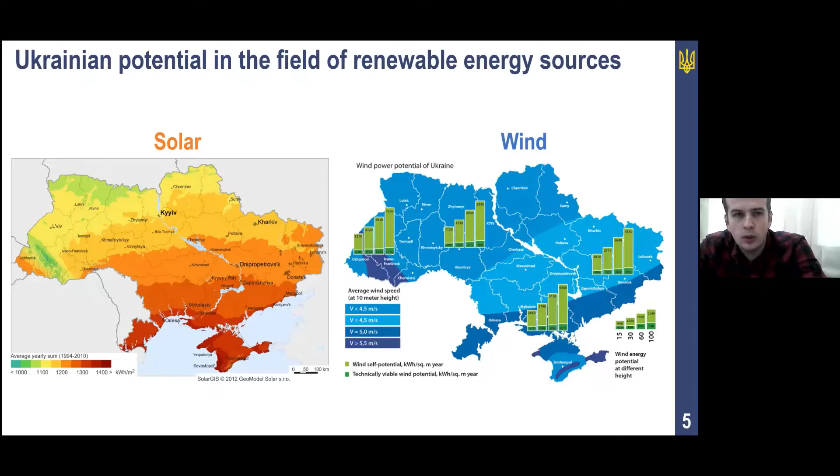Ukraine has huge potential in wind and solar, especially in our south regions, where we have huge solar installation and wind near the sea. Due to the last 3 years, we had a huge increase of renewable capacity and generation.

This was provided due to introduction of the feed-in tariff model. The installed capacity of renewables increased more than 4 times, most of it solar - about 7 gigawatts, 1.1 gigawatt of wind, and a little biomass and small hydro.

Also in Ukraine there is intensive development of small-scale generation of prosumers. Now we have about...

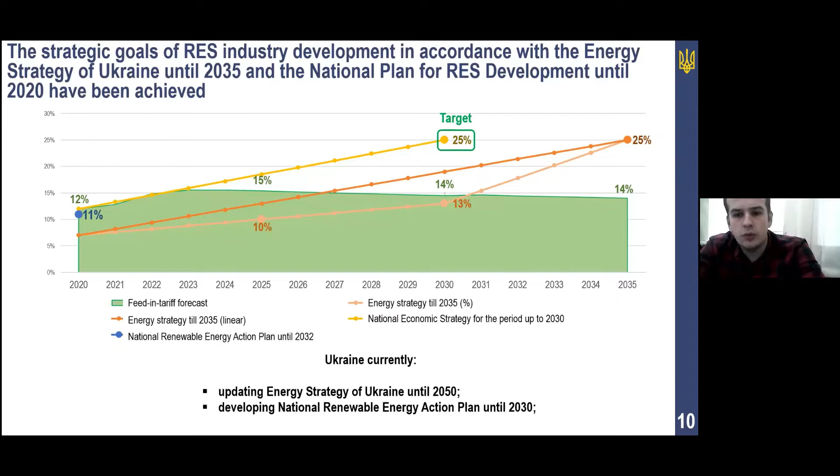The financial problems still exist, but the situation has improved. What's next? We are planning to achieve a target of 25% renewables in the 2030 electricity sector, revise our energy strategy, and develop a national plan. We plan to achieve this through auctions.

We created all the legislation for providing auctions through the electronic system, but due to financing problems, the auctions were terminated for a few years. I hope next year we'll launch it.

We plan to provide these auctions under the feed-in premium model, because existing objects were developed under the feed-in tariff, where producers sell electricity to the state-owned guaranteed buyer. But we plan to let existing producers leave the balancing group of the guaranteed buyer and sell electricity directly in the market and receive the premium. All new objects under the auctions have to be built only on the feed-in premium model.

In this case, we also plan to introduce guarantees of origin systems to confirm to the consumer that electricity was generated from green sources, and corporate PPAs, where RES producers sell electricity directly to consumers without any support.

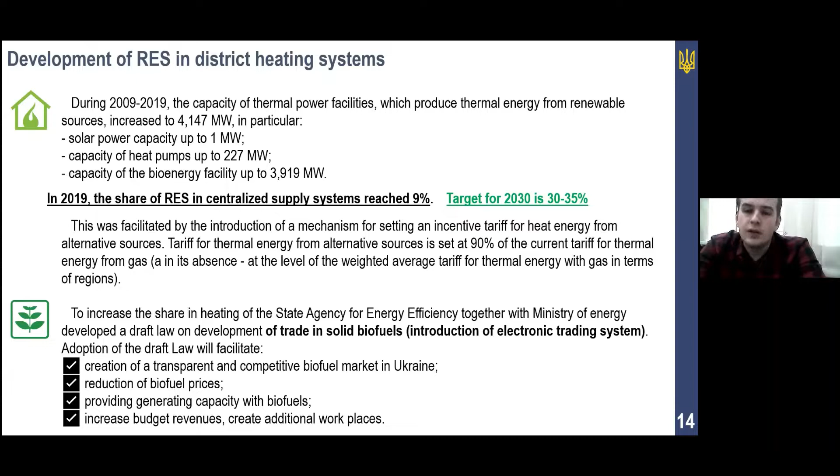A few words about district heating. In 2019 we reached 9% of renewables in district heating, mostly from biomass, and we plan to achieve 30% biomass by 2030, planning to introduce a biomass exchange. We were inspired by the example of Lietuva with a Baltpool biomass exchange.

The transport sector doesn't develop as well, but we see it's a problem in other countries too, where there's only more than 3% of renewables in transport. We're planning to achieve 10 or 14 percent by 2030. It's under discussion.

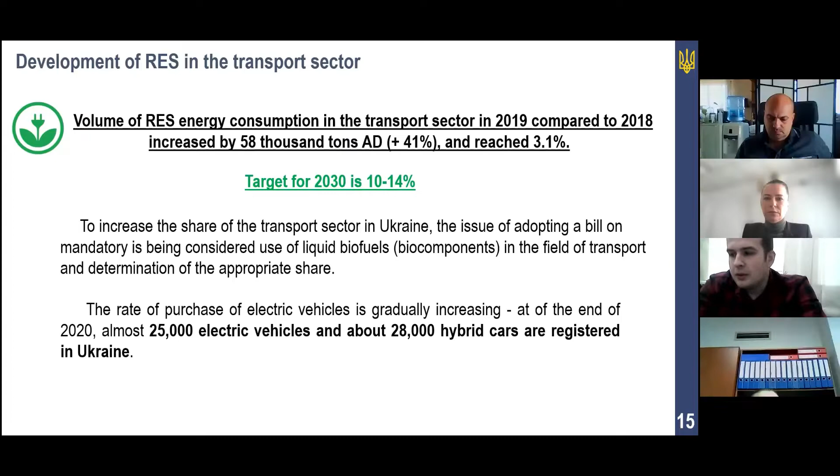But electric vehicles are really increasing in development in Ukraine. For example, in Kyiv we have a lot of charging stations, and I see a lot of electric vehicles and hybrid cars.

Other measures we're planning include construction of new maneuverable generation to avoid curtailment of renewables, and development of energy storage systems. The regulation has been developed and we expect it to be adopted by the end of this year.

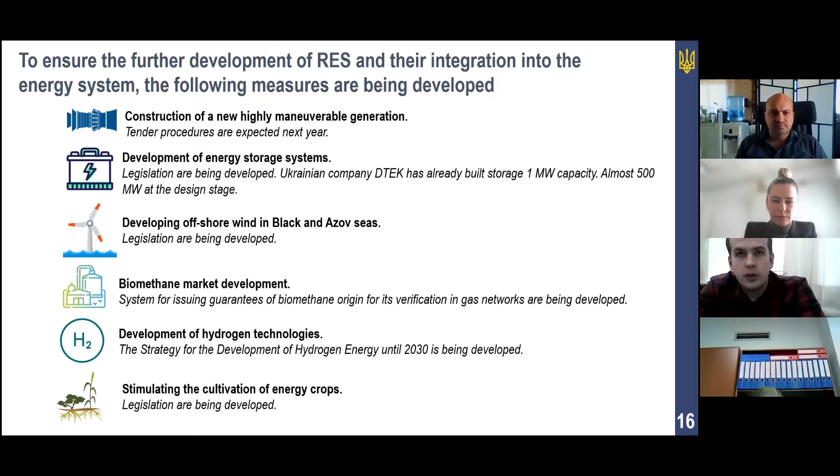One Ukrainian company, DTEK, has already built a 1 megawatt storage system and is now testing it, and other companies are planning to build almost 500 megawatts of storage. We're planning to develop offshore wind in the Black and Azov Seas.

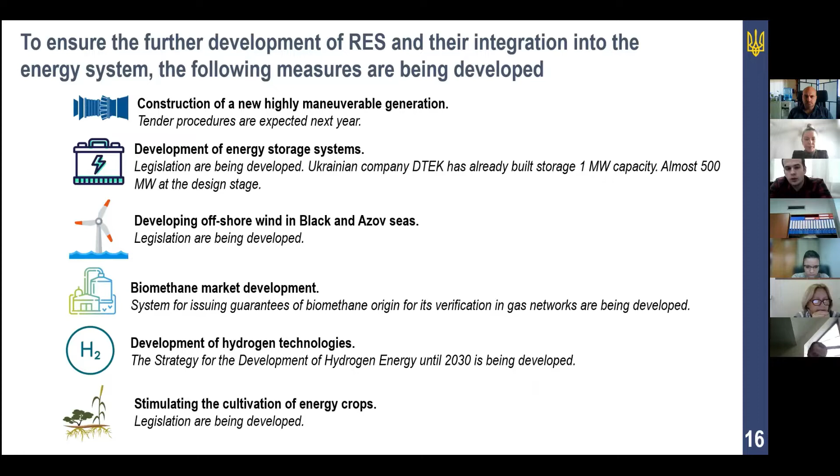Also developing the biomethane market, hydrogen, and stimulating energy crops, mostly for district heating biomass.

What we're expecting from the seminar is to get acquainted with renewable development mechanisms of other countries, to get recommendations on the integration of renewables, and to share Ukraine's achievements and the problematic issues we've faced in recent years.

I was watching the previous video presentations from other speakers, and we're especially interested in net metering and net billing systems. I heard it's introduced in Moldova and Georgia.

Yes, and this seminar is provided by an Israeli institution, and we're very inspired to know that Israel held successful auctions for solar with batteries, with a price of about 4.6 euro cents, which is lower than the market price in Ukraine. So maybe we could learn some experience on these topics.

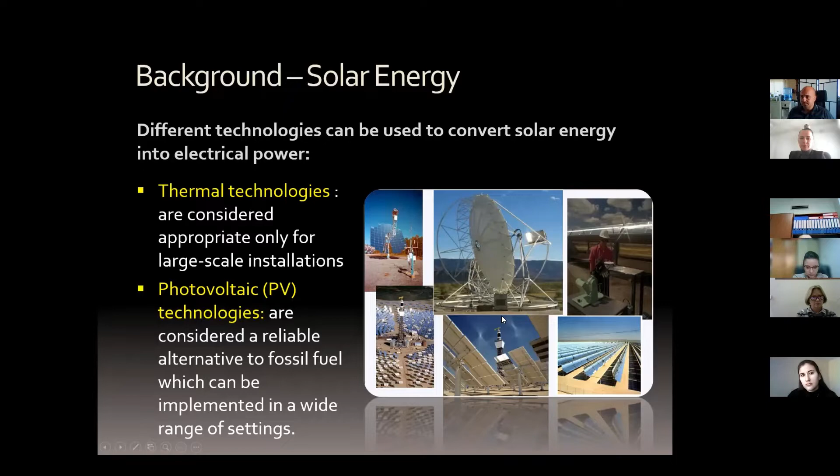Also, why do we use solar energy? Lots of obvious reasons, but there is almost no pollution or environmental impact at the point of using that energy. Of course, that doesn't account for the manufacturing process and where the materials are coming from, the mining of the material.

It is very flexible in installation, so we don't have to stick to a certain type of installation. It can be whatever surface that we have - we can always have solar panels that can generate electricity or energy based on the variables, so we can utilize the maximum or part of that maximum outcome of that energy.

It can be easily integrated in different surfaces. If we talk about buildings or open spaces, or even common spaces like parks or sidewalks, it's very easy to do it.

It's much less complicated than any of the other options, especially if we talk about stationary flat plates that don't require any tracking. So there are no moving parts, no mechanical parts, which means much less maintenance and service required.

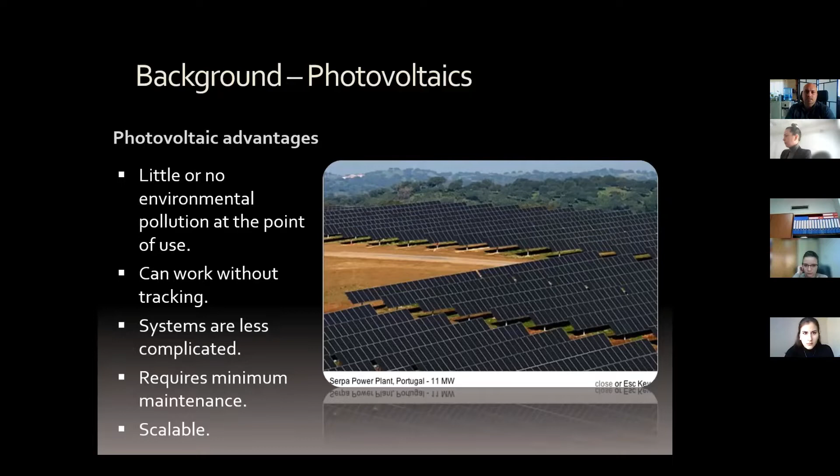Also, it's very easy to scale up. Once we install the system, that doesn't mean we are stuck with the size of the system - it can easily be expanded by adding other modules, expanding the inverters, adding other inverters, all that. Why? If we talk about, for example, a wind farm or a wind turbine, once we have the turbine, that's it - we are stuck with the size of the turbine installed, or the installed capacity.

A general look at what technologies are available for solar energy, mainly photovoltaics. So we have silicon-based, and that's the most common - the most common now I think are multi and single crystalline. I don't know if ribbon cast is still in use of the silicon technology. Amorphous silicon still exists, mainly because it's flexible - you can use that as a cladding material for rooftops, and it can be shaped in different forms to meet the requirement of the surface that we are using.

There are other technologies that are not silicon-based, and there is always competition between different research groups looking into alternatives for silicon. So we used to have the CIS technology that I don't think it exists anymore - I think it died something like 5 years ago. Actually, an outcome of this study was that the CIS technology is too expensive to be used. The balance of energy is not good - we are investing more energy in building the technology than what we're getting out of it in its lifetime. So it's not feasible. The cadmium telluride, the CDTE, I think it's still in use, but much less. The dominant now, as I said, is silicon-based, mainly single and multi-silicon.

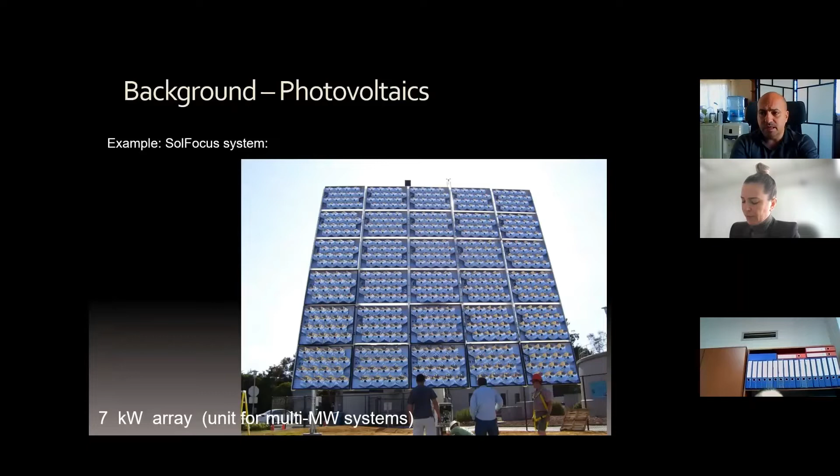One of the main examples for the concentrator systems, here we are talking about solar concentrator systems, is the SolFocus technology. SolFocus was created by two students at Ben Gurion University on the Sde Boker campus in the south of Israel. They actually moved ahead and established a company in South California that mainly manufactures this type of cell.

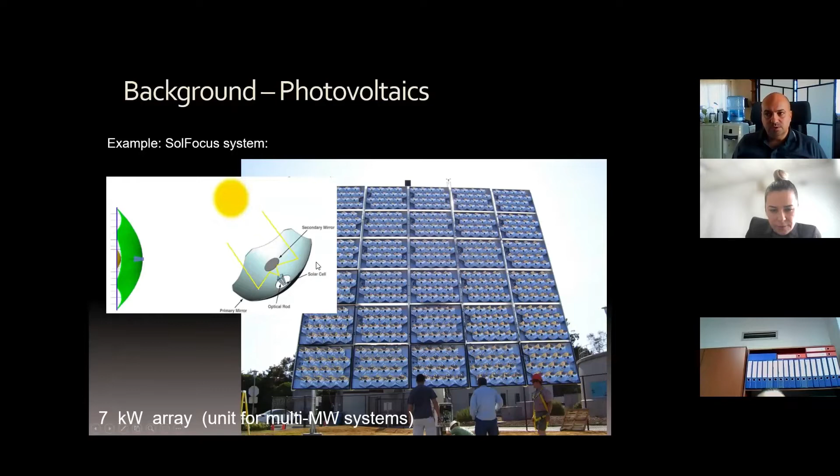It's a very smart design. If we look at how it works, it uses primary and secondary concentration of solar light with the use of solar geometry to concentrate that. I think they used to get something like 300 suns concentration for their system. So this unit, the one that we see here, is a 7 kilowatt array.

Another system, let's talk one more sentence about this one. Unfortunately, the company didn't survive for a long time. They actually operated for something like 7 years. But then, because of the mass production of flat plates and the difference in prices between flat plates and the SolFocus system, SolFocus simply died and couldn't compete with them. They didn't manage to get enough clients to buy the technology.

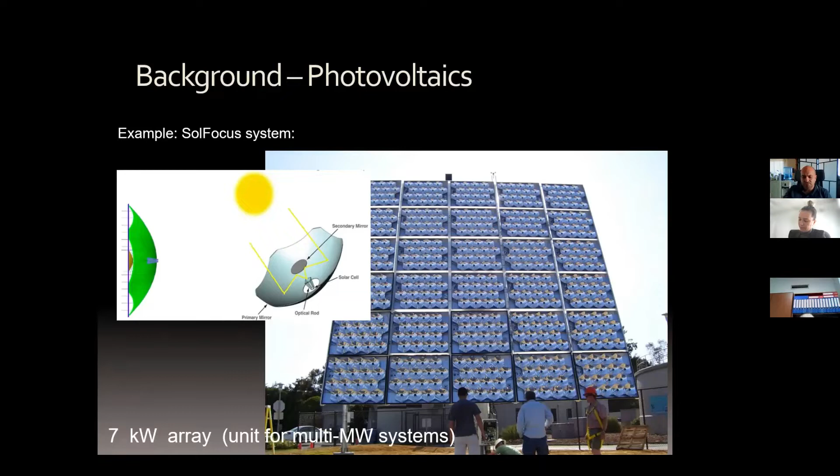Also, adding in mind the complexity, because it's a concentrator system, one of the main requirements for concentration is to track the sun hourly and seasonally. So we have to have dual axis tracking, and that makes the system more complicated, with more mechanical parts. Any misalignment with the sun will cause lots of losses. So people always prefer simplicity, especially if we get the same amount of output. And recently, the cell efficiency for flat plates is increasing, so it puts all these different options at risk.

The other system of concentrators is what's called FlatCon technology, or FlatCon systems. Very similar approach, but the main difference is they are using lenses instead of mirrors. So the concentration is done via a lens that concentrates the sun on a small spot where the cell exists.

You can see my pointer, right? The mouse. Over here, you see the bright spot, that's where the cell is. And one of the main advantages of using concentrator solar systems is the reduction in using cell material.

10 or 12 years ago, silicon was very expensive, and that's why the alternative technology option was very active. One of the main branches of how to overcome that cost is to use less material, less silicon, and the other is to find alternatives for that. So using less silicon means we need to have higher solar radiation per unit area in order to have a good output.

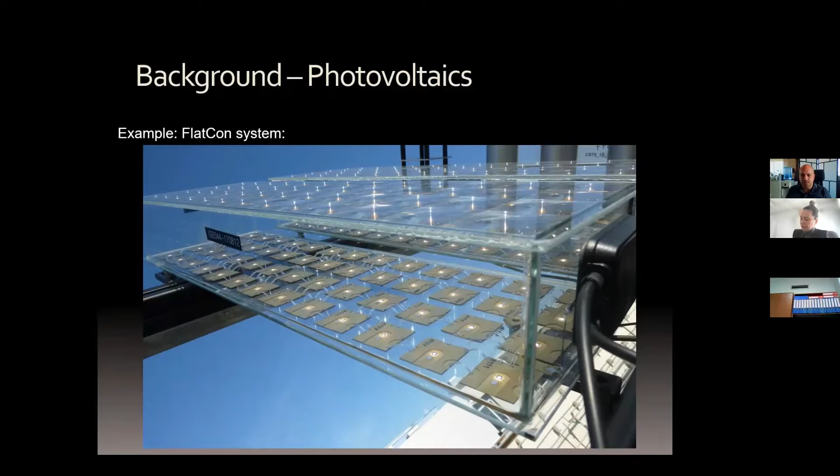This is also another system that was built by this company. I think FlatCon maybe still exists. I didn't hear anything about them for the last 3 years, but before that they were still out there.

So that's by technology type, and by installation type we have 3 different levels. What we can talk about is centralized photovoltaic power plants, and that's something we are all familiar with, with large fields. We get thousands of square meters, we install the system, we connect it at high voltage.

Or on the other end is building integrated photovoltaic, on the rooftop, on facades, and something in between, which is a combination of both. Like here, we can call it urban integrated, but in the study itself it's called kibbutz integrated, because the field of study was Kibbutz Ketura, where the Arava Institute is located. The main idea is to utilize all the different potential areas for installing solar energy and see what is the outcome we can generate.

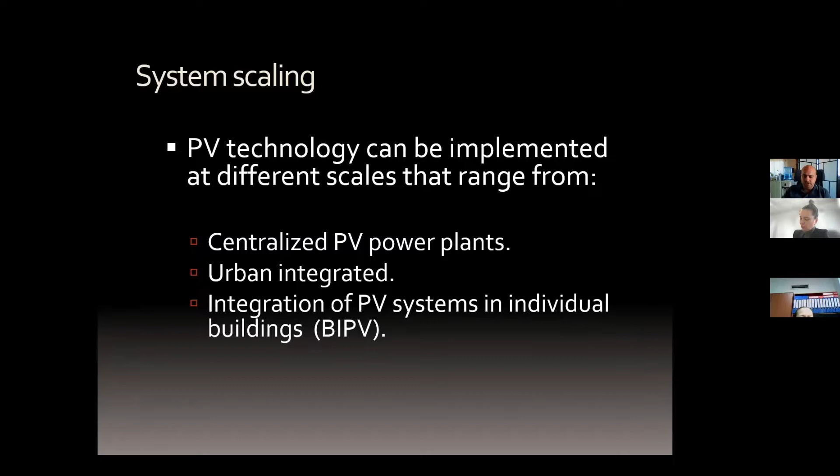Giving more examples and also the comparison of these different technologies, and why.

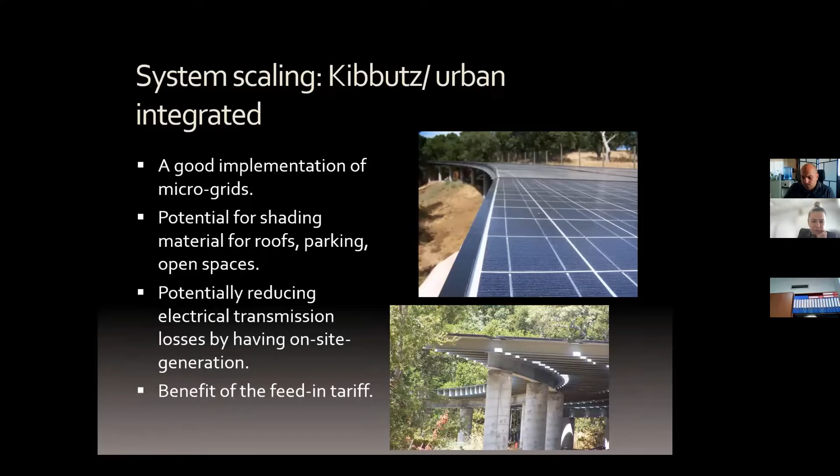For my neighbors, it was a very unique way of thinking about it. I have a nice terrace, and I wanted to put some shading material or shading structure on the terrace. Even though I live in a very warm city, today it's about 24 degrees outside, and rainfall happens only once or twice a year. But even with that, when people want any shading structure, they use that tilted roof, similar to what's in Europe, because it looks nice. But it's totally out of the architecture here, it doesn't fit with the nature of the city.

So I wanted to, instead of using that, use the solar photovoltaic system as the shading structure. I was very surprised that nobody did it before. It makes lots of sense — you have a space, you want to use it. In this way, we have a dual usage of the space: we generate electricity, and I can sit there at noon, especially since that area is south facing. It significantly reduces the heat the house is getting by having this shading structure.

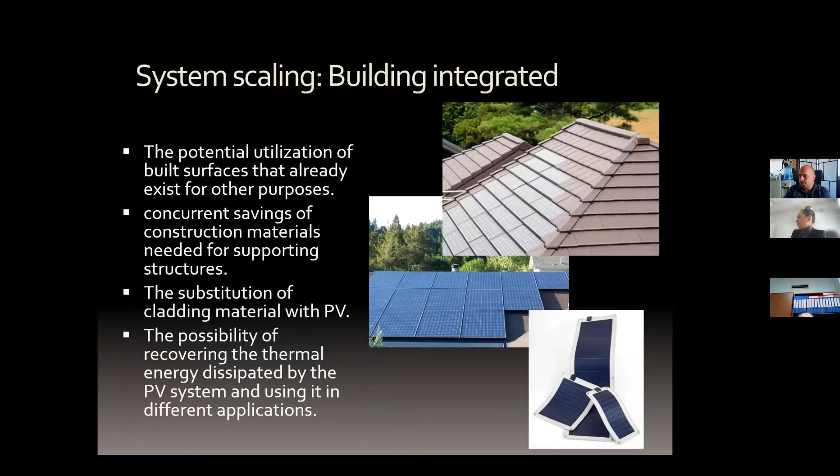Because of building integrated photovoltaics, the option of feed-in tariff became very popular — everyone can be an energy producer. Of course, we will not talk about the downside of that, how it's limiting or adding more variables to the grid and grid stability. But here we are talking about how households can benefit from that, and what's another incentive for them to be, to a certain extent, independent energy-wise.

The main downside is that the responsibility of cleaning, maintaining, and making sure the system is working lies on the owner of the household itself. Also, the size is an issue — we are always limited by space, so the amount of kilowatt hours we can generate is very minimal.

This is very suitable to what I always say, that we need first to look into energy conservation and saving before we talk about finding other sources of energy. It used to be, and I think it's still valid, that the major consumer of energy in buildings is heating and cooling. So first we need to look into our energy efficiency in the building thermally, how the building is functioning, try to maximize that efficiency, and then see how much of that required energy we can rely on solar instead.

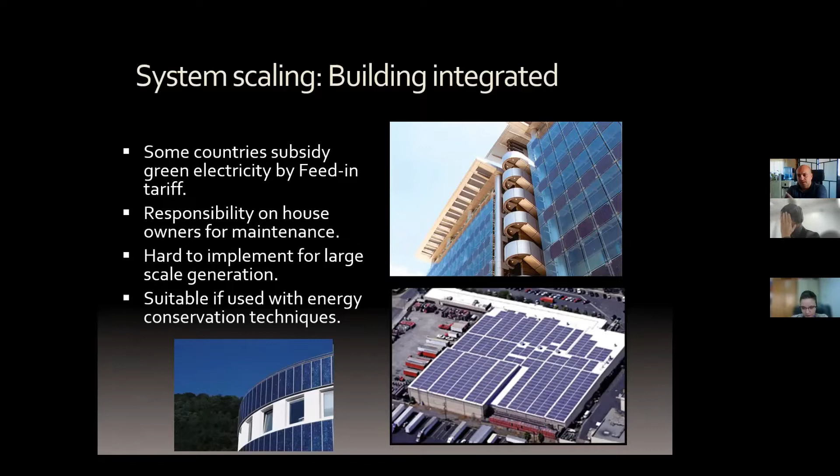So let's get to the topic: the life cycle, or energy life cycle, mainly looks into both the inputs and outputs of an energy system. The input energy, mainly called embodied energy, is how much energy we actually invested in order to build this system or technology — a measure for any technology we are using or manufacturing. The output is the potential output energy over the lifetime of that technology, or the energy balance of this energy system.

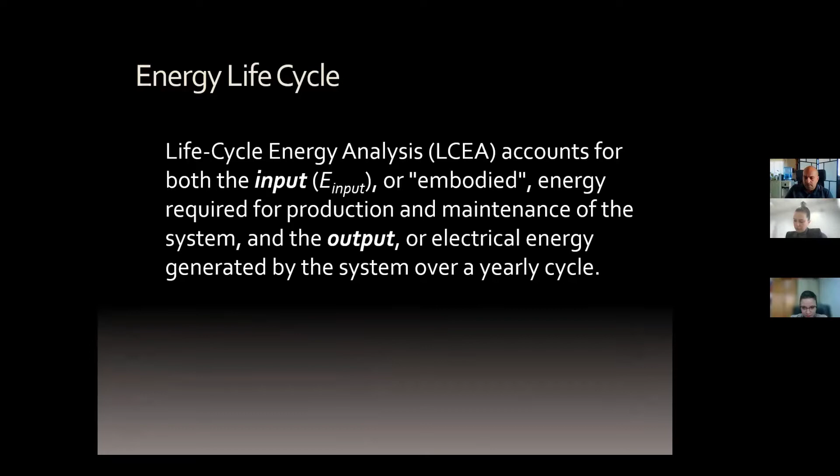To compare the two, for an energy source to be competitive with fossil fuels, we need two important characteristics. One is that the energy supplied by the system over its operational lifetime should be significantly greater than the input or embodied energy — simply that we didn't have a losing investment, putting more energy into something than what it will generate.

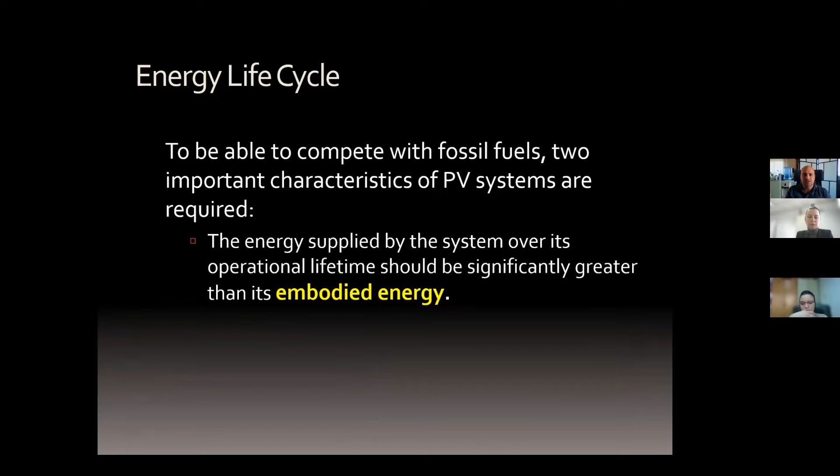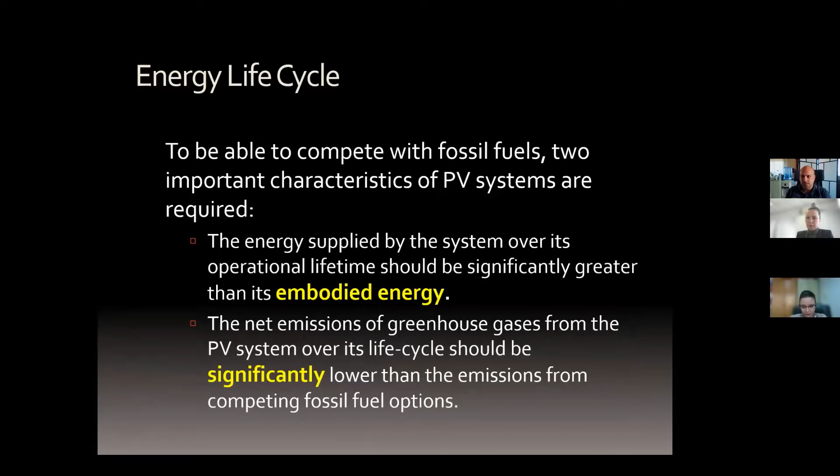The other is net emissions, which is mainly about being competitive with fossil fuel. The net emissions of greenhouse gases from that system should be significantly lower than the alternative of using a fossil fuel source instead. So this criteria will be our main judgment or evaluation for the technology we are using.

So how we measure that is mainly by looking to the life cycle energy analysis. The life cycle analysis looks into the life cycle of any product, from manufacturing, even mining, even before that, all the way down till decommissioning and disposal. We take every step of that process and try to account for what different resources that product required in order to be manufactured, used, delivered, assembled, and even disposed.

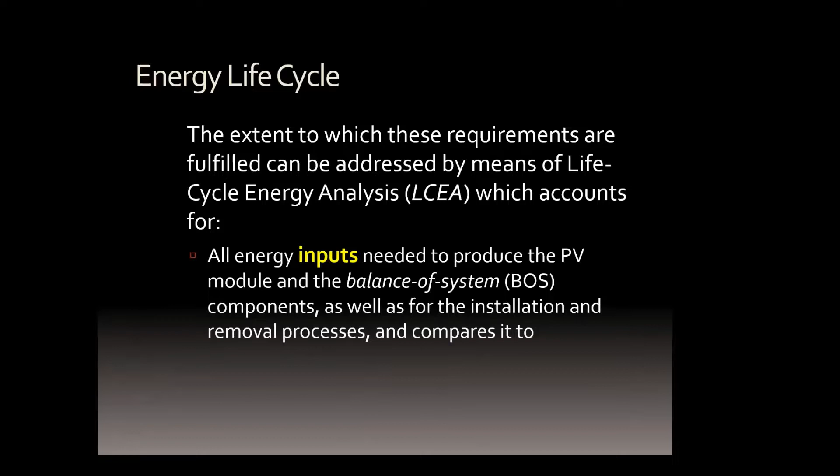If we talk about life cycle energy analysis, then we are only focusing on the energy component of that analysis. What we need to do is account for all the input energies that we used for building the module. If we talk about photovoltaic here, then we are talking about the module itself, the cells, the frame and the encapsulating material, the packaging, transportation, and also the balance of system, which is the support structure, the tracking if it exists, and cables and all the different non-photovoltaic components of our system.

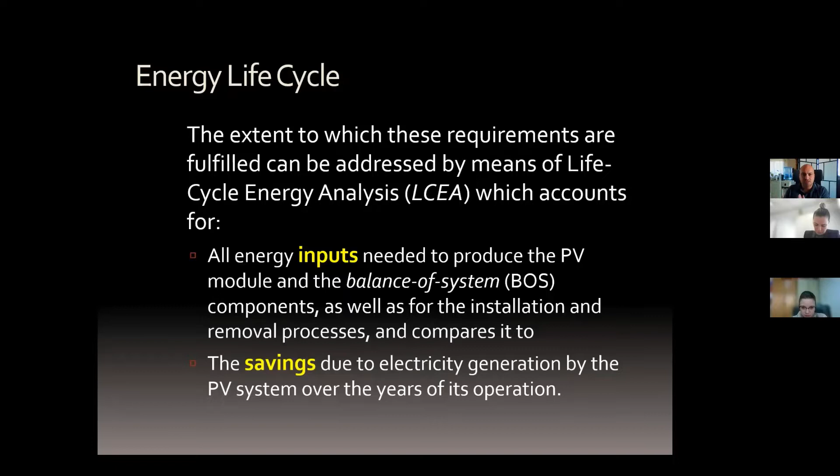Then that will be compared to the savings, how much energy we are actually saving by using that technology afterwards. In other words, what is the output of this technology that we are using? As you noticed last class, I love flowcharts. So this is a simple flowchart of how we actually do this comparison, or this life cycle energy analysis.

The first step is we prepare a list of the different photovoltaic technologies that we want to compare. Here I'm talking about photovoltaic, but this can be used for any other technology. If we want to talk about the different technologies used for biomass, geothermal, tidal, all the different options can be listed.

Then the first calculation needed is how much energy we are getting out of this technology. For that, we need to get what is the initial bulk of energy available, how much solar radiation is there in that specific location that can be utilized to start with.

We also take into consideration the heating potential of the PV. We know that the efficiency of a photovoltaic cell is dependent on mainly two things: one is the available solar radiation, and the other is the surface temperature of the cell itself, or the cell temperature. Then we need to understand, in that specific location, what is the potential of heating that we will be dealing with. Then we talk about the efficiency, mainly the nominal efficiency, how much the manufacturer says this panel can convert the available solar radiation into energy.

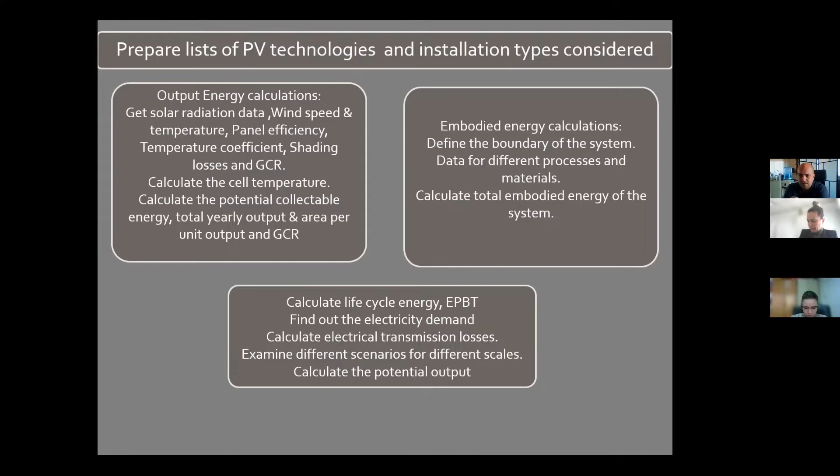Then we calculate the different measures or factors, first the life cycle energy, which is the total number, and the energy payback time. The energy payback time is a very interesting number for engineers and for economists. It's similar to the return on investment - it's like, in how many years, or what percentage of yield, is the output energy compared to what we invested in building the system. So the energy payback time is a very useful measure.

Then we can also calculate, in order to get to these numbers, what is the demand of electricity in this specific location. Do we actually need it, and if there is extra energy, what will be done with that extra energy? If we're using transmission lines, there are for sure losses in that transmission line. We should account for this in order to get accurate numbers at the end.

To compare different installation types, we come up with different scenarios of what installation we need. For example, if we're using a centralized power plant, we know for sure the power will not be used at that centralized power plant - we need to transfer it somewhere else. That introduces other variables, like energy losses in transmission and energy losses in transformers, like increasing the voltage level to be able to transmit it, then reducing it to be used. Based on that, we do our calculations on how much actual energy we have at the end of the wire, the end of the cable.

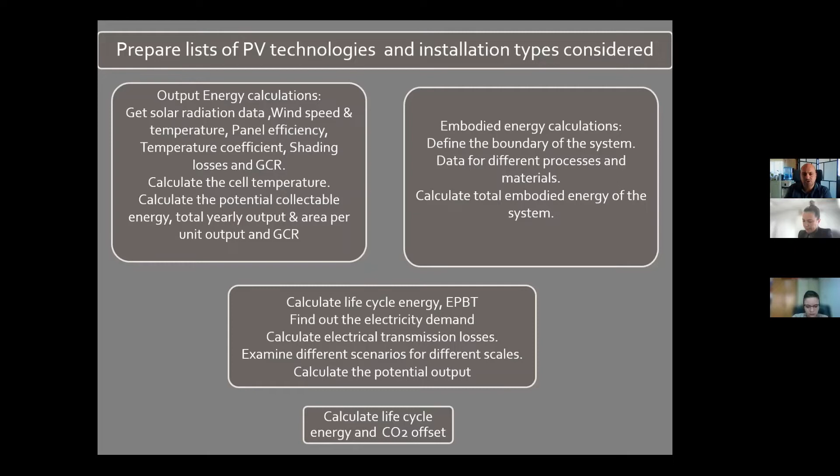After that, we use equations we'll talk about here, like calculating the life cycle energy and the CO2 offset. The CO2 offset is a very interesting parameter that gives a good indication - everyone is talking about reducing CO2 emissions, but nobody talks about how to actually do that. Using renewable energy for sure reduces your CO2 emissions, but if you have very strict goals to meet and very limited options of technology and available land, how do you decide which technology to use to get the higher CO2 offset for your electric system? So we introduce a new parameter, based on all the previous calculations, that gives us a value for that piece of land - what is the potential CO2 emission savings if we use this technology or another?

Let's go more in depth and look into the input energy, or embodied energy, in a photovoltaic cell. We broke the system into 4 components. The cell material itself - if it's silicon or other than silicon, multicrystalline or single crystalline. Then the encapsulation material, the thin film they put on for protecting degradation and holding the cell, plus the conductors that collect the energy produced. Then the balance of system - the tracking system, the support structure, the frame of the panel itself. And then transportation - once the panel is ready with the inverters and all that, how we transport it from the factory to the place where it will be used.

Then we talked about the system boundaries, and in order for us to proceed to have an output, we need to have limitations. Otherwise, we can go forever in our calculations.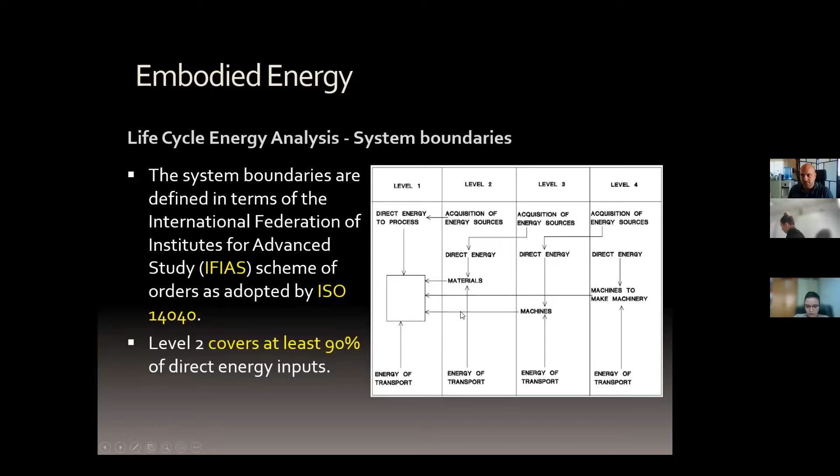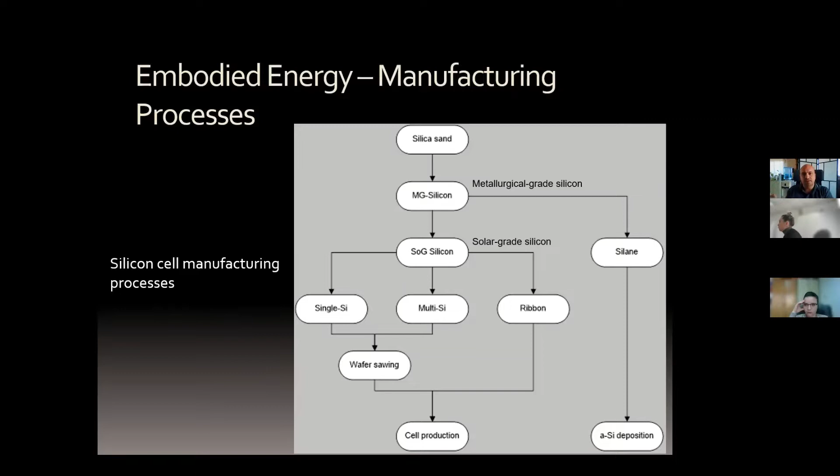Then sawing that ingot and getting the different cells. There are also losses in all these processes when we get from the silicon all the way to the cell - losses, I mean, other than energy losses, there are material losses as well.

We also looked into other types of cells, the CdTe and CIS. For that, there is a totally different process because they are using different materials. So here also we need to look into the different stages of manufacturing. What I found out is that the process of manufacturing these alternative technologies is much simpler than the process of manufacturing silicon-based cells.

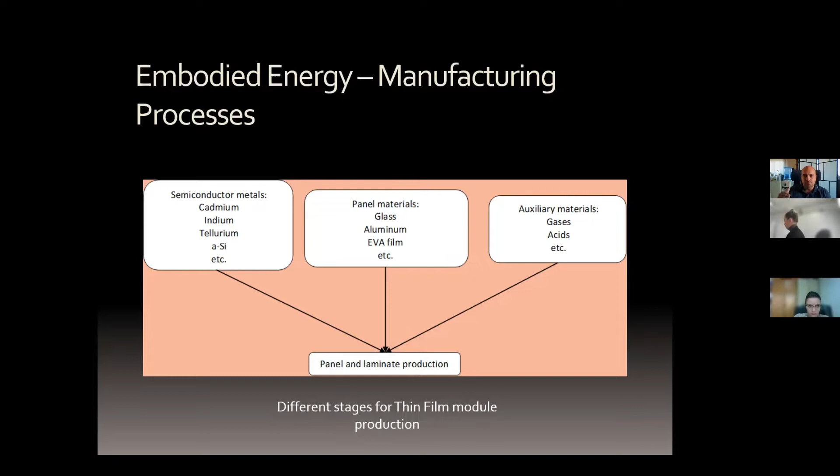So when we look into the different stages, there are available datasets that already provide the energy uses for different processes in manufacturing. They have a very good number of information, or of data, actually, on what is the values of energy used in order to go through each of these steps.

So after we get all the energy inputs, we account for the different variables. I'm going a little bit faster because we want to give some time for discussion and also afterwards for the projects. So I'm touching mainly on the principles of the process. If you need more details and are interested in the detailed calculations, I'm very happy to send you more material about that.

It's simply my master's thesis, so I'm very happy to share it. We actually did a publication on that. So we look into the output energy of the panel, and for that we need to calculate based on, as I said, hourly data, and even higher resolution than every hour is even better - we'll get more fine tuning for our system. For any photovoltaic cell, we have two main variables that we need to look into, or restraints, I would say.

The collectible solar radiation - how much is there to start with - and what is our cell efficiency. It's like, okay, we have an X amount of energy to start with. Our cell can only utilize 16% of that. This is where we are actually starting, at 16% of what is available for us. These are the main limitations we talk about - everything else is variable.

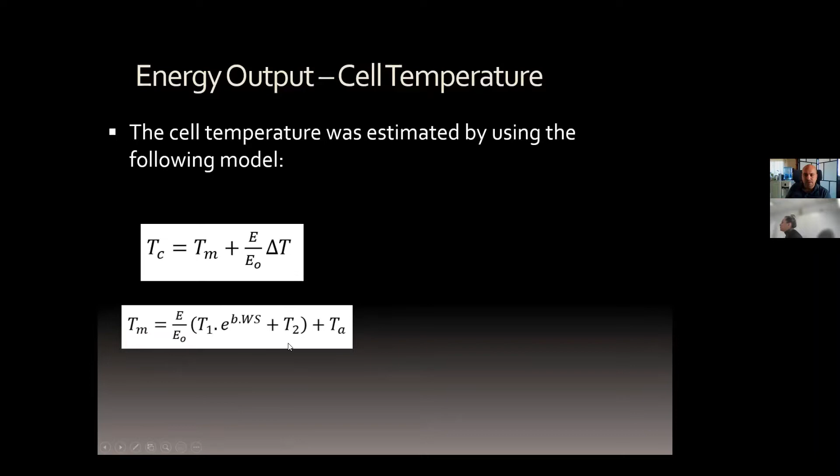Based on that, we use a model generated by a US researcher. I don't remember his name, but I have the reference if you're interested, for how to calculate the cell temperature based on the atmospheric temperature and the temperature coefficients. Here we have mainly two variables, T1 and T2, and both are dependent on the material of the module.

What was used? Is it glass? Is it plastic? Is it 2 layers of glass, 1 layer of plastic and 1 layer of glass, or all of that?

TM is the surface module temperature, measured or calculated here. If we don't have it measured, we can have a good estimation of how much it is.

TA is the ambient temperature, the measured temperature of the location where we are. The solar radiation on the module, and the solar radiation as a reference, which is the standard test condition. The wind speed, to account for the cooling effect of the wind on the panel itself.

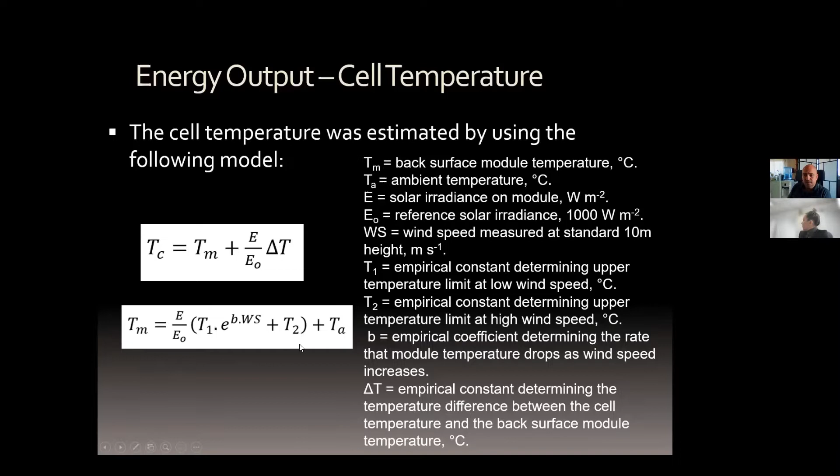Then we have empirical constants based on what type of material is being used. And the delta T is another constant that will be used. I give different reference values of these different coefficients that can be used.

By simply plugging in the ambient temperature and our solar radiation and the variables here, we get the potential cell temperature. By knowing the cell temperature, we can go back to the nominal temperature coefficient and see how many degrees above 25 we are getting. For each degree, we have a 0.4% decline, for example, for multicrystalline, on our efficiency.

Then to account for the ground cover ratio, we said that the ground cover ratio is how much of the land we can utilize for our system. There are different numbers already published by other researchers we can use, or we can work with geometry and try to find out what amount of shading is acceptable and what is not.

So keep in mind, if we are using a polar mount, tilt equals latitude, for example in Jordan and Israel we use something between 20 to 25 degrees tilt angle for the panel in order to maximize the yield between winter and summer, when the sun's angle is different in the sky.

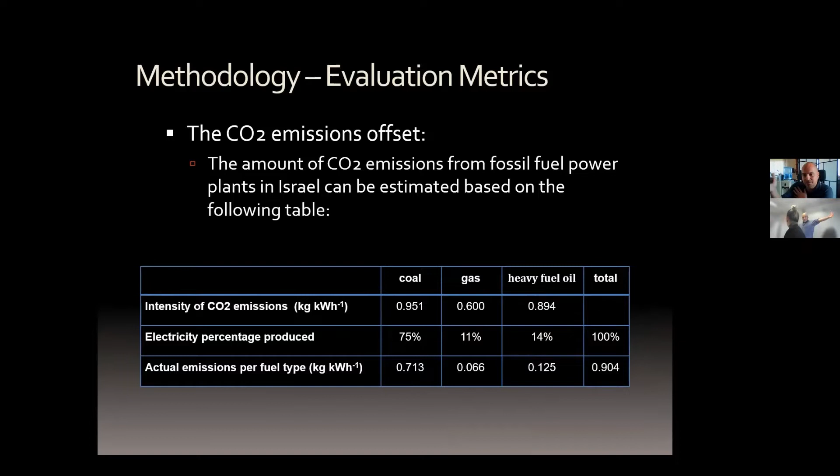Why is this important? Because what we are offering here is offsetting a certain amount of energy, of power, with solar energy, for which we already know the energy payback time and the energy return factor. We already have these numbers. So here we are saving the system that amount of energy by introducing our solution, which means we are offsetting the amount of CO2 that will not be used anymore by using our system.

So in the calculations, in the results I will show in a little bit, a 20-year operation lifetime was assumed for the thin film, because thin film technology degrades faster than crystallized silicon. For crystallized, we assumed 30 years of operation and a degradation of 1% per year in the efficiency of the system.

So we got the CO2 emissions, which is the total energy balance, how much net energy we are getting from our system, multiplied by the potential CO2 emissions. The potential CO2 emissions is the equivalent number, which is this weighted average. And the energy balance is actually the output minus the embodied energy we already calculated.

Based on that, we can say that if we use a single crystalline stationary tilt-equals-latitude PV power plant, then we know the amount of CO2 we are offsetting, saving our country. If we say, okay, we are using a mix of technologies...

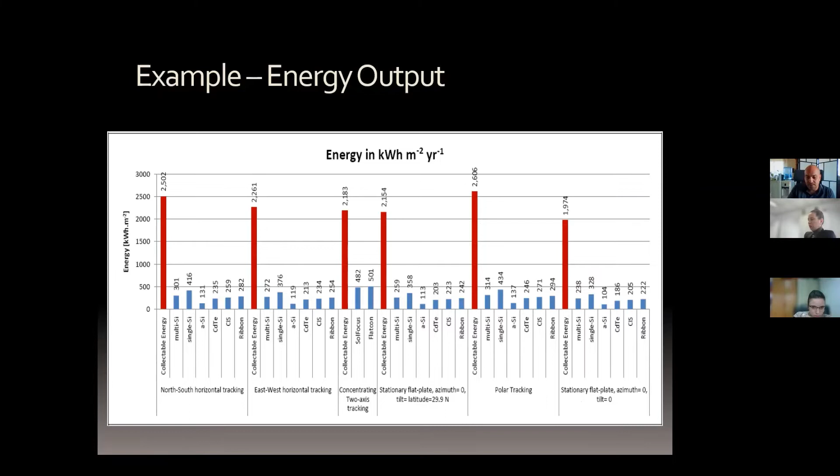The worst was the stationary installation, because that doesn't account for any variables, like the Earth's rotation around the sun having different positions based on the year and time of day. So we are not utilizing that at all.

I always keep telling people—one of my friends wants to use LED lights for agriculture, and they say we can use the light itself as a source of energy to reduce our heating load. I tell them LED has a certain power rating, usually like 5 to 10 watts. Based on that—sorry, I live next to the mosque, so we keep hearing that all the time—anyway, if your input is already 5 watts, you cannot get more energy out of it. You cannot heat your plant using an LED light because the input energy is low, so the heat loss from the LED is very small compared to a regular light bulb.

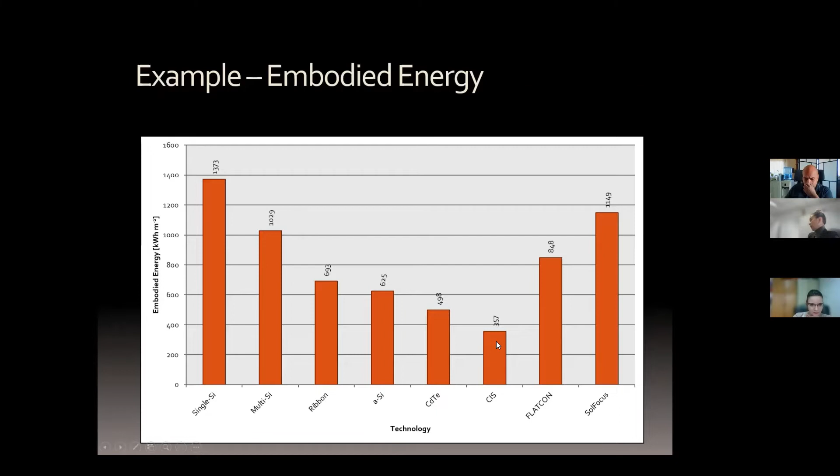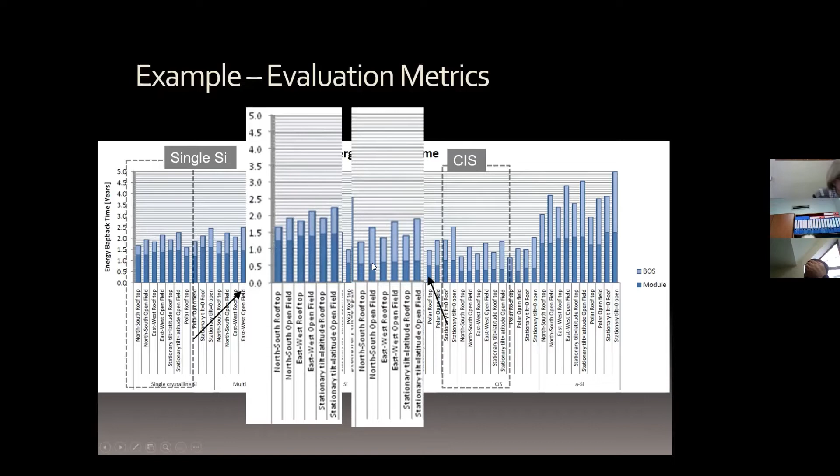Amorphous silicon always needs more land than the others because in this study it had around 6% efficiency. Then the next ones are the ribbon, or the CdTe and CIS ribbon as well. The expectation and output of this study was that one of the worst technologies to be used is the a-Si, because once we look at the different variables, it shows the worst performance.

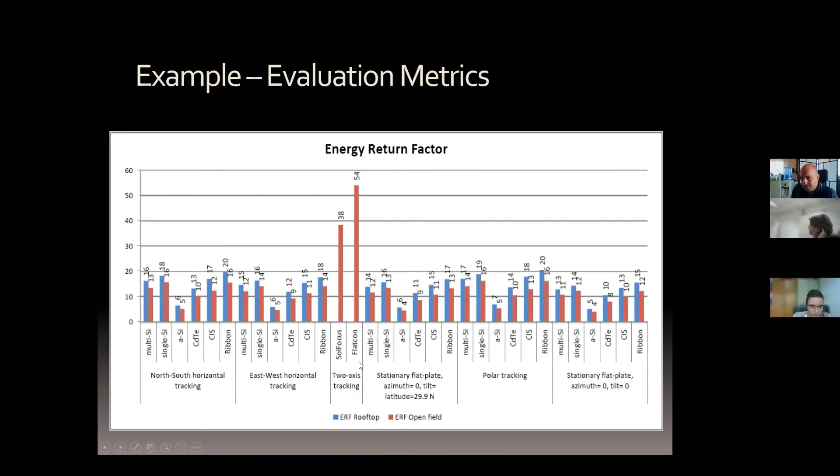Another comparison between the two. Then we combine that with the CO2 offset per land. The blue is for rooftop and the red is for open field. The main difference between the two is the support structure. With rooftop, we're already utilizing a building that's already built, so the energy was already invested in building that system and we're just using it as our support structure. In open field, we need to build all that support structure, like the foundations. There are different approaches, like ramming instead of concrete foundations, but I don't think that will change the equation much.

We see here, for example, that if we have limited land, single crystalline, which has the highest energy efficiency, is much more suitable to be used as a flat plate without any tilt than any other technology. Do you know why that is? Even though tilt equals 0 doesn't account for the seasonal changes and changes during the day, we still get the higher numbers for tilt equals 0 flat plates.

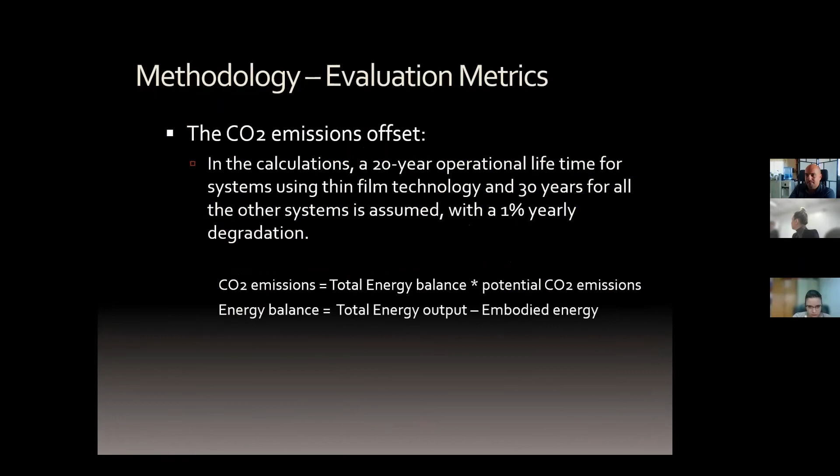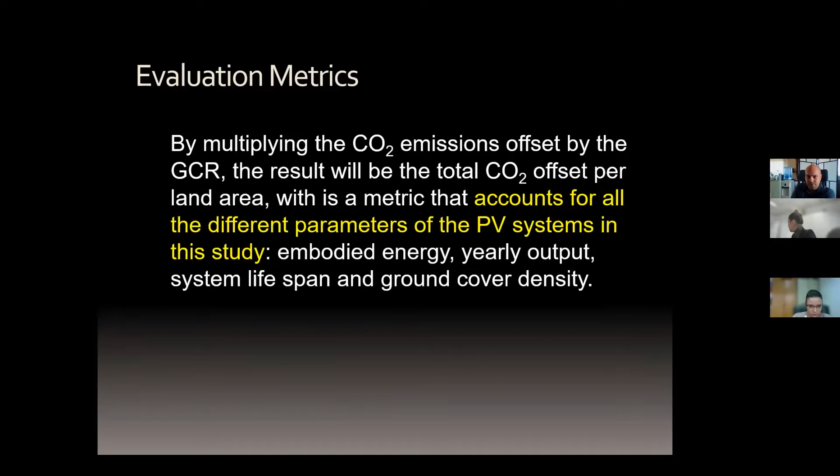No, this is CO2 emissions, multiplied by the ground cover ratio. We said for flat plate with tilt equals 0, the ground cover ratio is 100%, so we are utilizing the whole piece of land. This shows that the main element in our calculation here is the area, the land.

But then what we need to keep in mind is how feasible this is for us. We can utilize it in theory, but of course we cannot get to 100%, that's what we said. In theory we can assume that, but in real life we cannot get 100%. We need to have access to do maintenance, service, and cleaning, and for that, 100% is not possible.

I would say that the current, most common approach right now is stationary with tilt equals latitude, which is this one. We get almost half of that as CO2 offset per land area. There's another reason here, other than the 100% ground cover ratio: we don't need as much support structure. The support structure has to account for wind speed. If you have the system elevated from the ground, there's a high potential of wind uplift, so the wind effect on the system will be higher. If we have it flat with tilt equals 0, it can simply sit on the ground, meaning we don't need to elevate it, so there's much less steel and concrete used.

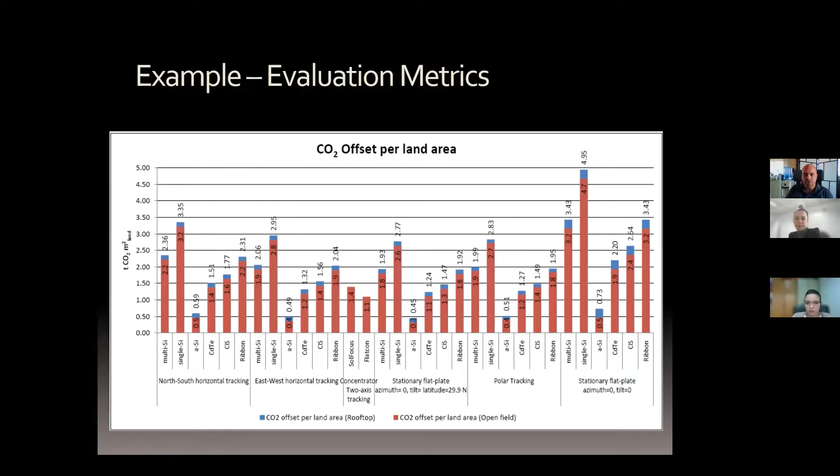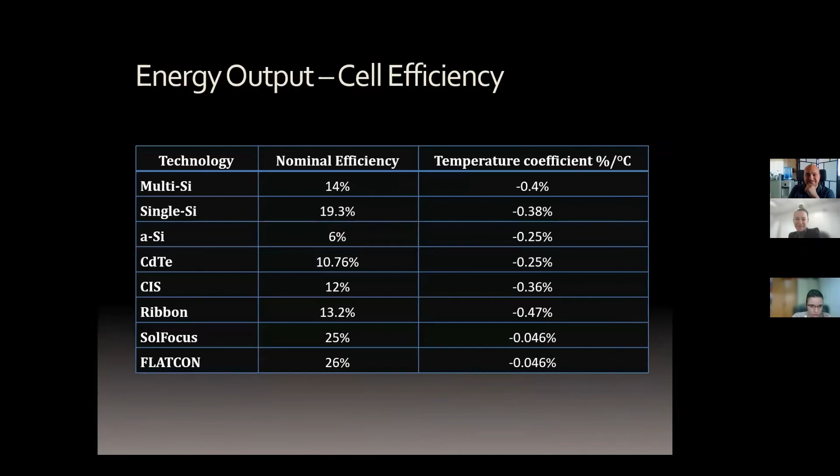Katrina, I see you are saying something, but you are on mute. Or maybe you are talking to your colleague. I was just talking with my colleague, because my internet connection was unstable and I couldn't hear properly, so I was asking. Okay, I didn't hear the last part, but it's because of the internet connection, so no problem.

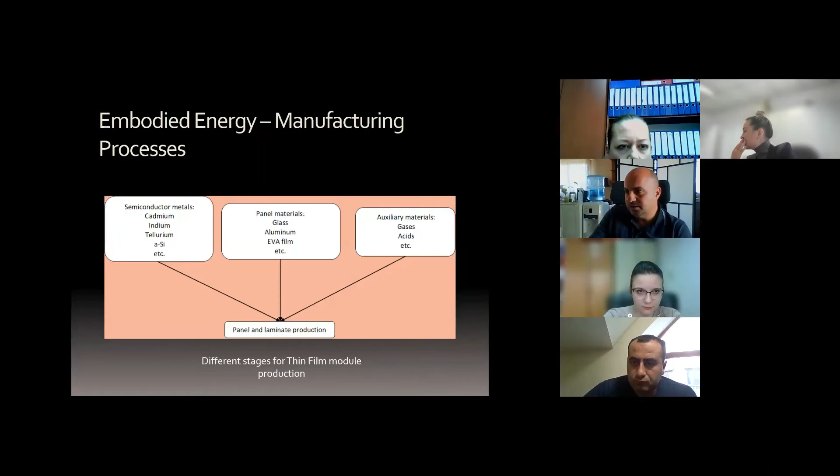For bifacial photovoltaics, it's a great idea of utilizing more of the radiation if we look into the equation. What they do in the bifacial panel is this: they cannot control the direct beam component of the collectible energy, so they wanted to increase the diffused and global radiation by having cells mainly allocated to collect these two components. By tracking or changing the tilt, you increase or control the direct beam. By adding the back side of the panel, you increase the diffused and global radiation. This way they increase the collectible energy.

Now let's look into what is the potential increase, what's the potential output of that, and compare it to the cost. How much does it cost us, both in money and energy? What I know is that they usually use lower grade cells for the backside, not the same grade, because it's very expensive, and they know the output of these panels is always lower. So they don't invest that much in it.

What I would say, in order to evaluate that, I want to see the numbers. I want to see how much energy we invested in that. If we want to talk about engineering, then we talk about energy: how much energy we invested, and what is our benefit from this for different types of installation. Then we can say that this type of technology is more suitable when we use polar tracking or tilt equals latitude. For sure, it's not useful with a flat plate at tilt equals zero, because there is nothing underneath to reflect.

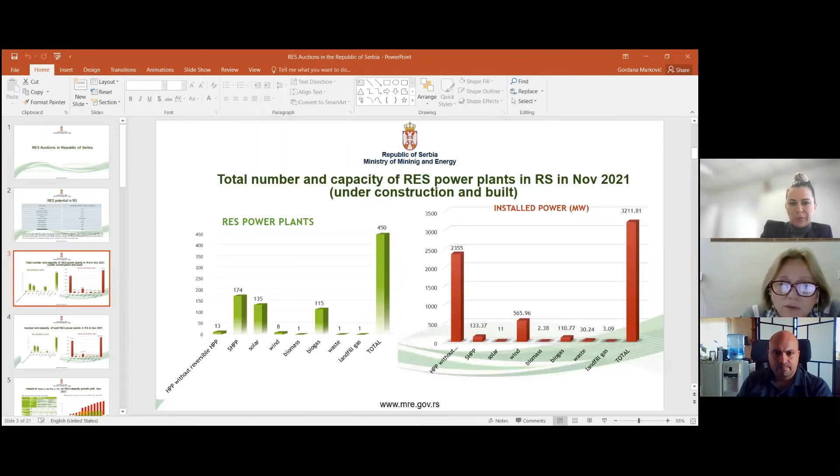On this slide, we can see the total number and capacity of RES power plants in Republic of Serbia at the moment. We have 450 RES power plants with total installed capacity around 3.2 gigawatts. Regarding built RES power plants, we have 333 power plants with total installed capacity around 3 gigawatts.

Regarding RES share in Serbia, we didn't achieve our goal. Our set goal for 2020 was 27%. We achieved 21.44% in 2019. Our plan was 25.6%. We are almost 4% under our goal for 2020.

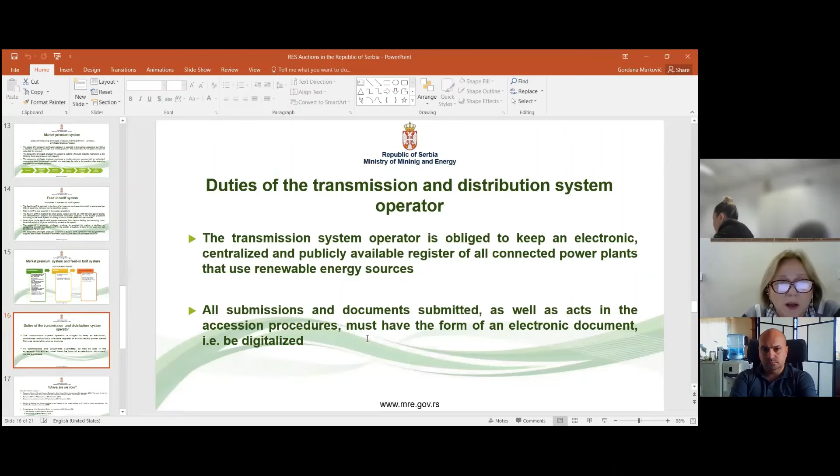Our transmission system operator is obliged to keep an electronic, centralized, and publicly available register of all connected power plants that use renewable energy sources, and all documents must have the form of electronic documents. We adopted almost all bylaws under the law on the use of renewable energy sources. The energy agency adopted methodology for setting market premium, for setting feed-in tariff, and adopted a decision on setting maximum repurchase price for auctions for electricity in wind power plants.

It is 5.57 euro cents per kilowatt-hour for wind power plants with capacity higher than 3 megawatts. And I think the main problem is it is almost 50% of the feed-in tariff. We are not sure that the first auctions will be attractive for new power plants.

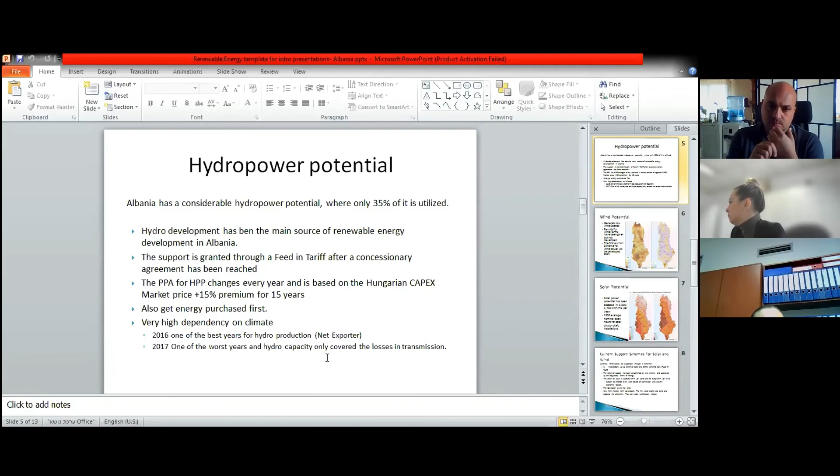Wind potential: generally, we have a low wind speed. Permits for wind farms have been given, but not development. The first auction scheme for wind power will be developed soon.

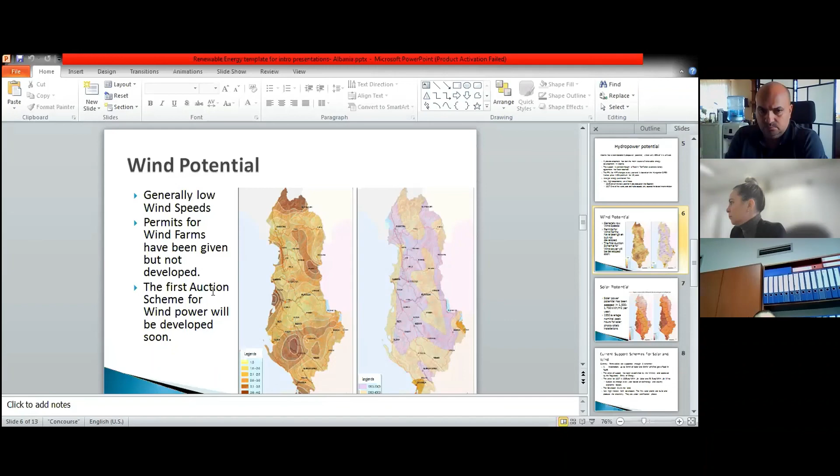Solar power potential has been assessed at 1,500 to 1,600 kilowatt-hours per square meter per year. We have a lot of power for solar, and we have 240 to 300 days in a year with solar.

We have supported schemes for solar and wind through three schemes. Installation up to 2 megawatts of solar and 3 megawatts of wind gets feed-in tariff. The price of support has been established by the ministry and approved by the regulatory entity of energy.

The price for 2017 is €100 per megawatt hour for solar and €76 per megawatt hour for wind. This price is subject to change every year, based on technology and economic factors.